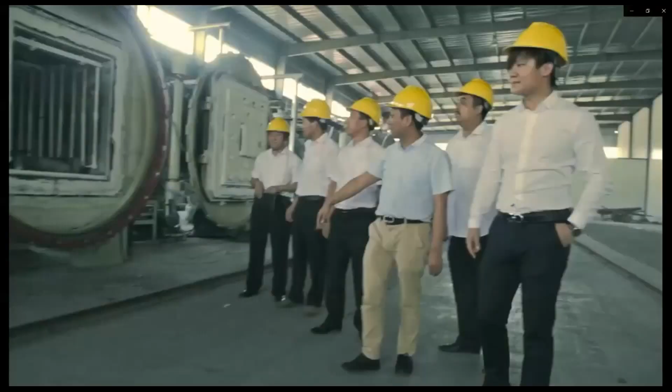After nearly 30 years of unremitting development, it has become the largest non-metallic wear-resistant new material production base in China, under the leadership of Chairman Jia Jianguang. Pengfei has adhered to the concept of independent innovation, winning 17 national invention patents and 31 new patents, the National Building Materials Industry Golden Globe Award, Independent Innovation Award, Best Non-Metallic Refractory Award First Prize, and a Special Achievement Award, International Patent and New Technology Export Golden Award, etc.

Exquisite, only because of the long experience.

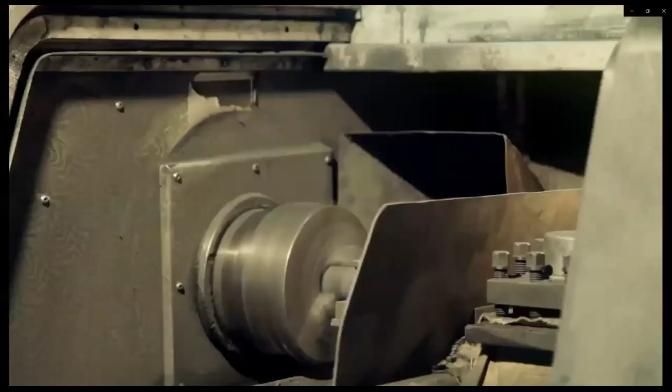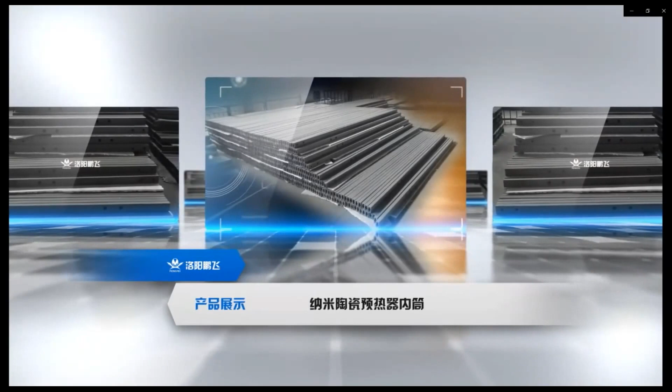Luoyang Pengfei Wear-Resistant Materials Company Limited is a high-tech enterprise mainly engaged in research, design, production and sales of high-tech wear-resistant materials. The products stand nationwide and are exported overseas. The company successfully developed nano-ceramic wear-resistant coatings and wear-resistant anti-corrosion pipeline components, nano-ceramic preheater inner cylinder, cast-steel ceramic composite lining, grinding plate, and nano-ceramics.

The newly developed cast-steel ceramic composite lining grinding plate lasts more than 10 times longer than domestic similar heat-resistant steel products, reducing friction temperature by 40%, and is widely used in cement, mining, steel, military, shipbuilding, armored vehicles, tank chassis, aircraft, and train industries.

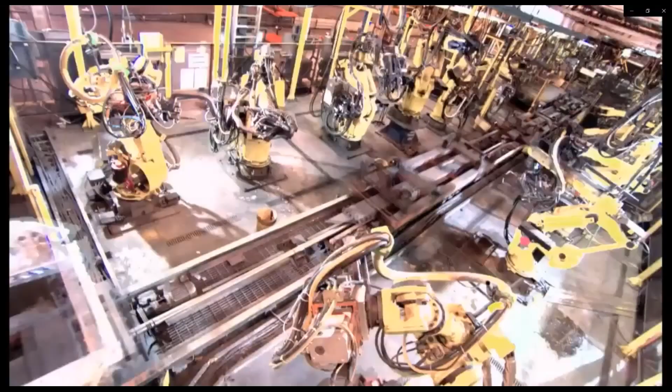The nano-ceramic preheater inner cylinder solves the problem of easy oxidative corrosion and deformation of metal inner cylinders at high temperature working conditions, extending service life by more than 2 times compared to the metal inner cylinder. It brings great contribution to plants by saving energy, improving production processes, and increasing economic efficiency.

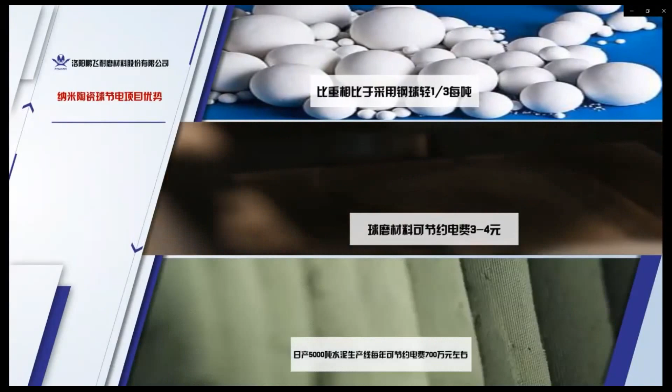The nano-ceramic ball power saving project utilizes a grinding system for cement plants by reducing electric consumption. $1 million will be saved annually for a daily production capacity of 5,000 tons cement production line using PF Series ceramic ball. Pengfei has become a famous brand through development of high-tech products, and in the future will continue to make more contributions to energy saving, product life, and economic efficiency for our customers.

In 2013, Luoyang Pengfei Wear-Resistant Materials Company Limited invested $15 million in the industrial cluster area of Ruyang County. The first phase of the project has been completed and put into production. In 2015, the annual growth rate was over 40% and profit increased by 200%. In 2016, the industrial sales value doubled compared to 2015, and profit increased more than 10 times compared with 2015.

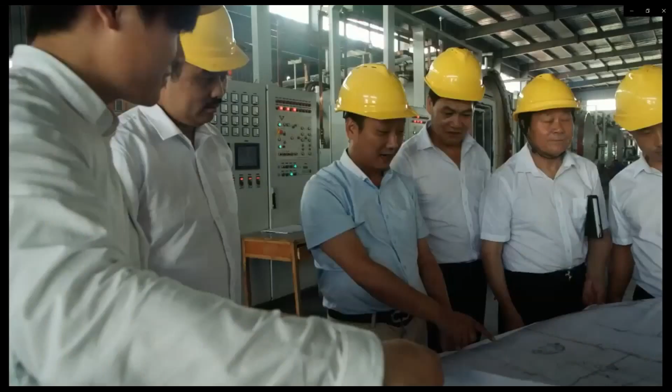In October 2015, the company's new third board was successfully listed, with stock abbreviation Pengfei Shares, stock code 833829, and now Pengfei is planning to achieve GEM listing within 2 years. It has become one of the most profitable enterprises attracting investment in Ruyang County.

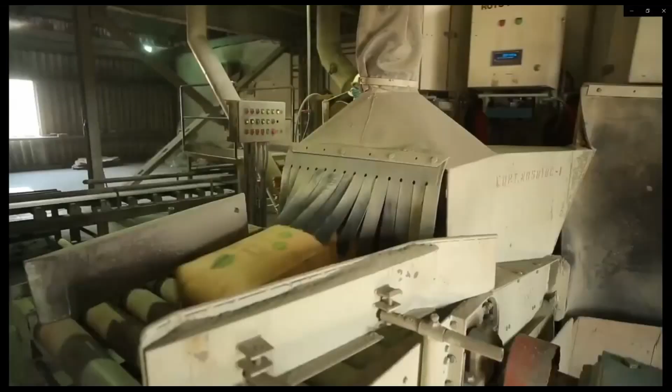In the future, Luoyang Pengfei Wear-Resistant Materials Company Limited will mainly serve the cement, building materials, and military industries to meet a broader development prospect. Hop like a fish in the sea, fly like a bird across the sky. A company that constantly innovates and maintains vitality will stand proudly at the forefront of the market and continue to write a new chapter in Pengfei.

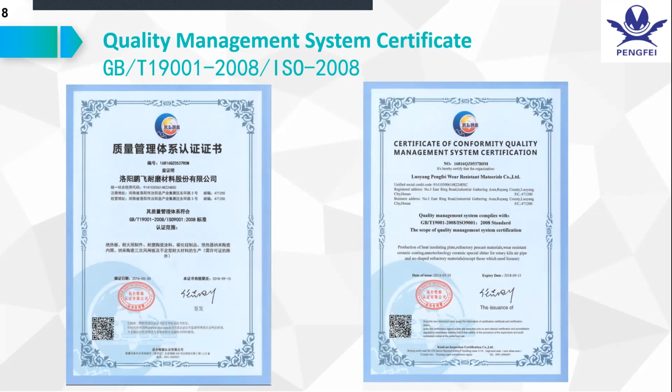As an international company, we have our ISO and GB/T management certificates. Okay, here we can go faster.

This is part of our long-term partners. As a 30-year history manufacturer, we have served most of the biggest cement players in the world - as we know, Conch, Sinoma, CNBM, Jidong, Heidelberg, Lafarge, and also in different countries like NCC, RCC, world brands. Also, the original equipment manufacturer in Shanghai is using our wear-resistant materials as original equipment. So you may now know what we do.

So here we go, I'm going to give you more details about our jobs and our products. We generally work in 3 sections. One is conveyor pipelines, where we transfer materials - big pipelines or small pipes, elbows - which protect this kind of equipment in cement plants or power plants, and also metal and other industries, specializing in cement and power plants.

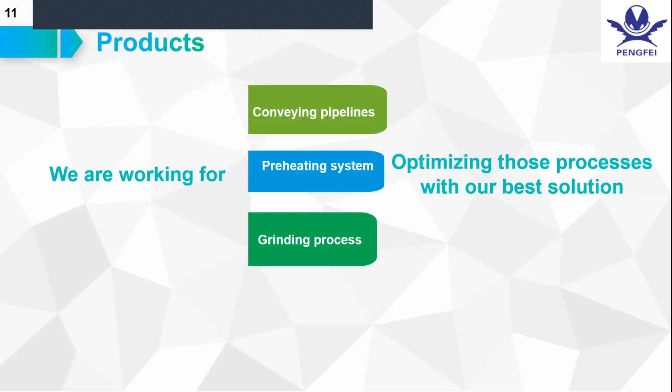And preheating systems, like cyclone stages - as we see the biggest tower in cement plants - and also one part for the grinding process. We have some products which are applied in grinding systems. Okay, so next.

First, as we said, we mainly do R&D specializing in industrial ceramics, applying in cement and power plant industries, etc. And you may ask, what does industrial ceramics mean? Usually there are many types - for example, aluminum oxide ceramics and silicon carbide ceramics. These are the major ones in industrial ceramics.

As for performance, aluminum oxide ceramics has a very high melting point and is very strong, with high hardness that can reach about Mohs hardness level of nine. It has super high strength, good chemical resistance, and good dielectric properties. As for another type of industrial ceramic, silicon carbide, it has high temperature strength, as we know, and also high thermal conductivity.

When aluminum oxide is matched with silicon carbide under high temperature, it's a perfect material with very stable performance, good for wear, abrasion, and corrosion resistance. That's why it's often used under high temperature, like in power plants or cement plants, a great material in technological fields such as national defense and high-tech industries. So it usually works in harsh working environments.

Next page, here we can see a sample picture from a plant I have visited in past years. You may be familiar with this kind of corner. The first picture versus the last page, we can see the second one is a big difference. Why? The second picture, which is very organized and clean, is from my client CUCC in China.

Right now in China, every plant's new line from beginning to end, from the mill to the silo, has been well protected by wear-resistant materials, ceramic coating. So the first picture, as we can see, let's go back to it.

Here you can see why this has dust everywhere. Why? What causes this? This is generally from the maintenance side, because the metal steel pipe gets heavy abrasion from the high-strength airflow materials transported during working conditions. So if the metal or steel pipe isn't protected by any materials, it gets broken, small holes often, and especially the elbow area may wear out easily after a couple of months.

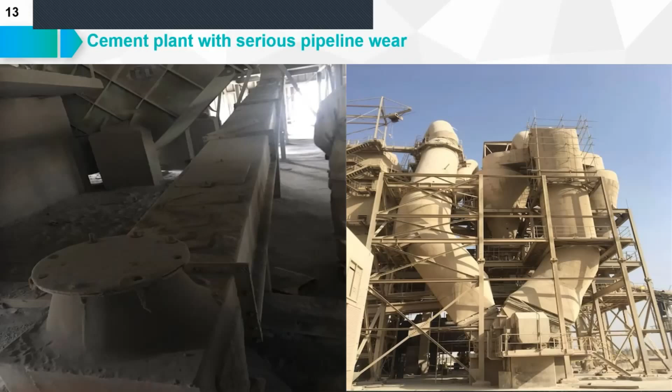Okay, next page. Here's what I'm first talking about: the importance of applying wear-resistant ceramic coating to protect your pipe and save your maintenance, to be more efficient with our products. So this is the beginning. Okay, let's see the reason, as I'll explain.

In cement or power plant industries, we have data showing about 50 to 55% of downtime is caused by wear and tear problems. Due to such very high-speed powder airflow conditions, traditional metal pipes have difficulty meeting such working conditions. That caused the problem we saw in the pictures.

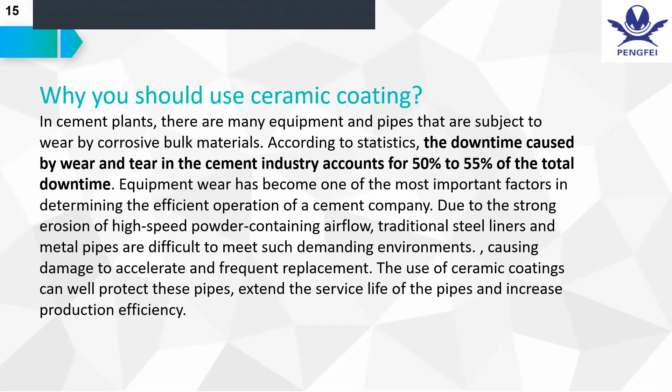And we're wasting a lot of manpower and money on repairing and big maintenance, so using ceramic coating is a very good idea to protect the pipes, extend service life, and make your production more efficient. Simply saying, saving money. Okay, next.

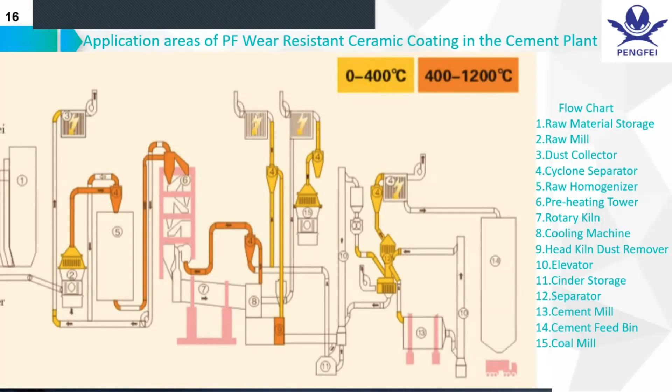This is a flow chart of a cement plant showing the pipe conveyor from the mill to the silo, with different colors and picture highlights. The wear-resistant coating materials have several types matched with different temperatures suitable for working conditions. Usually, low temperature control, like the mill, is no more than 400 degrees, and for high temperature, no more than 1200 degrees. We have different sections for these. Okay, next.

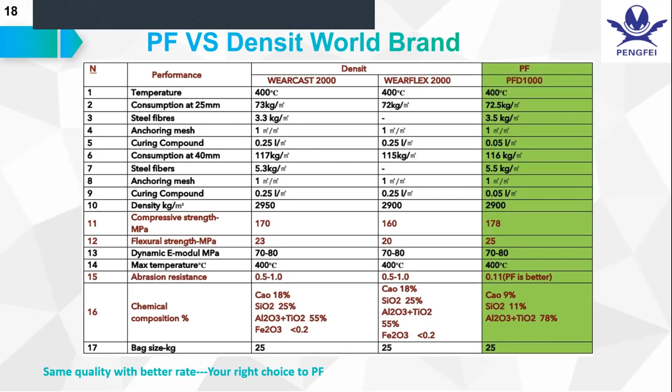Okay, next one. Ceramic coating is actually a very easy installation, like castable. They just have the metal mesh with fibers, mix with water, and apply in the pipe. So what's the difference between ceramic coating and castables?

Because they both have wear-resistant materials, you can see the big pipe. With ceramic coating, we only need to apply 25 millimeter thickness. When we reach the same function, same wear rate, castable usually has to apply about 100 millimeter. So the thickness is about 4 times more.

You can imagine in the pipe, when you apply on both sides, it reaches like 200 millimeters of castable - the inner diameter will be totally changed and get influenced, impacting the conveyor. Your materials' original design will get impacted. That's why ceramic coating is the perfect idea to replace castables in these pipes for these reasons. Okay, let's go to next.

I'd like to share one of our installation videos of ceramic coating wear-resistant materials, how it's applied on site. Okay, thank you.

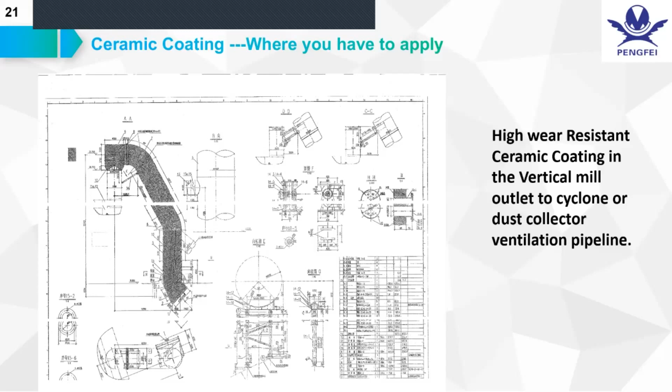So we just quickly go through where we have to apply during the cement plant process - the separator area, as we see. Okay, next.

Vertical mill - you see this is a big abrasion area. If you didn't apply here, you would always have abrasion problems.

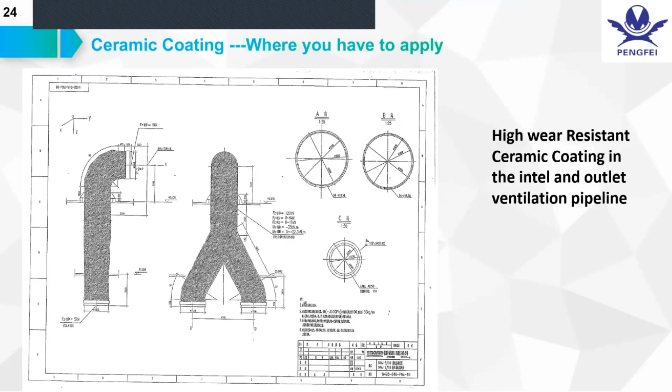Okay, ventilation pipeline. Next. The cyclone area. Okay, next.

Now this is a big pipe which applies ceramic coating wear-resistant materials. For small pipes like the coal mill, or very small diameter where people cannot enter, we have ready-made pipes or elbows connected by flange, with the wear-resistant materials ready inside, to set up directly at your plant.

Okay, now let's move to another process - the preheating system, which we can see showing the joint ceramic dip tube. Okay, inner tube, let's go.

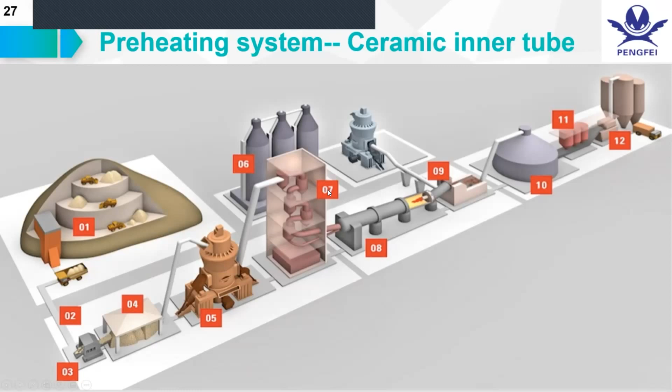This is a preheating tower. Usually we're familiar with the preheating system's cyclone stage. Here the materials are transferred by hot gases, and from the upper stage going by air vortex down to the bottom, to the cyclone at the bottom, and then come out to go to the kiln inlet.

So what are the functions of the cyclone preheating system? We can see the general function of the cyclone is to separate the materials from the hot gases. As we see in this figure, the hot gases and materials enter through the duct. Then inside the cyclone there's a very fast vortex separating the materials, going down, from the hot gases.

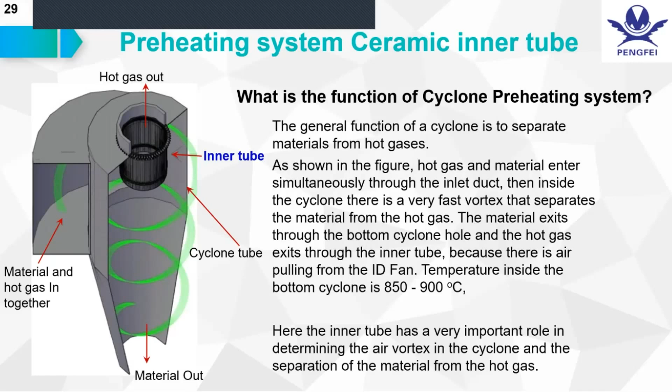So here, when we reach the cyclones down the line - for example C1, then C2, C3, C4, C5, even C6 - the temperature will even reach about 900 degrees, some even reach 1000 degrees, pulled by the ID fan. So we can understand the inner air vortex and cyclone, and the separation of materials from the hot gases. Okay, next page.

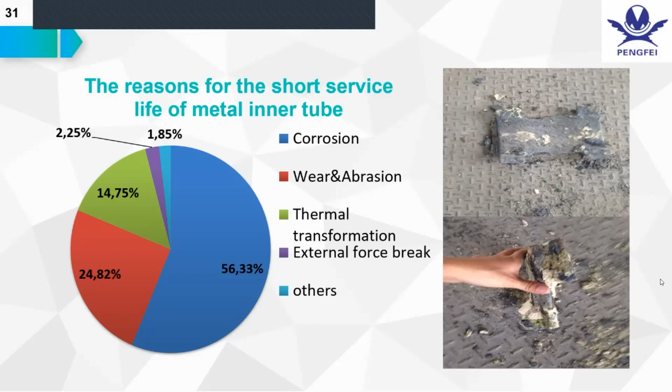Here, how to extend your inner tube life, as I explained, how to make your preheating system more safe. What happened in history before: the metal inner tube fell down and caused an accident that killed two people, two workers. That's why the Chinese government has very highly controlled this, like cyclone stage 5, we are obligated to replace it every 12 months. We have to replace it with a new one because it's a full risk and you don't know when. It's like a potential killer anytime.

So we know your problems. We have the perfect solution for you here. The Pengfei ceramic inner tube is invented to solve those problems, to replace heat-resistant steel materials. For example, for cyclone stage 5, we can extend the service life more than 2 or 3 times. From the factory, we guarantee 36 months of use.

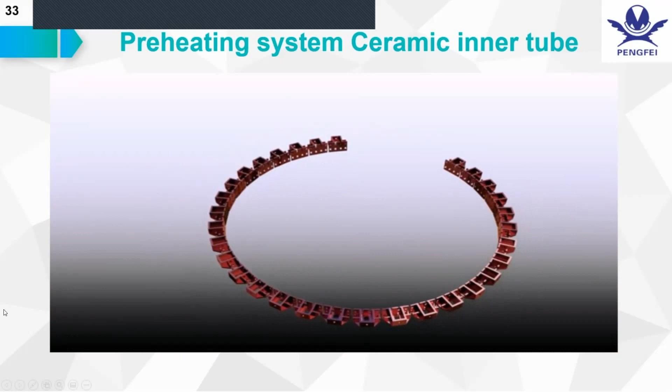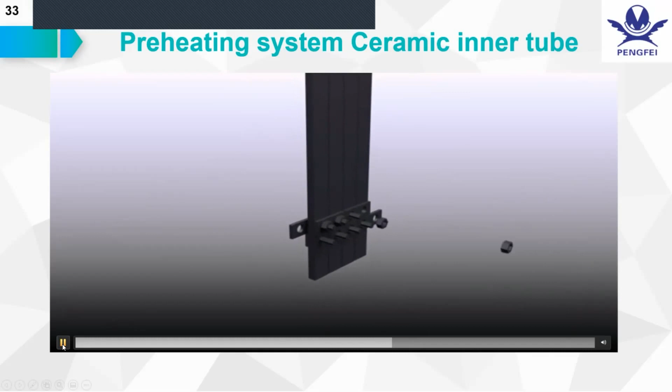I don't know if the video has voice or not. Now we see this. Okay, let's make a pause here.

Here we can see this red spare part, which is called the connection board. It's made of heat-resistant materials. Here it will be welded with the flange, and then connected through screws with the ceramic strip hanging parts. Okay, let's go.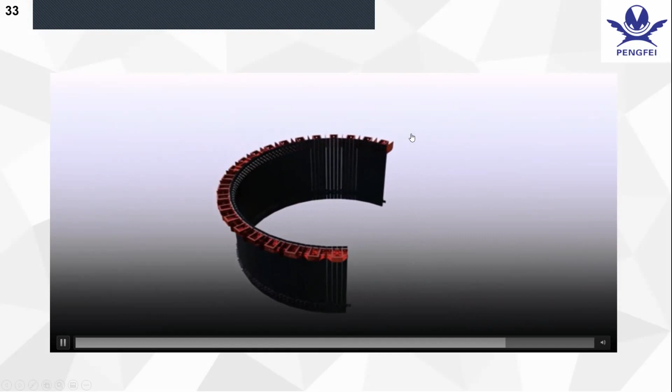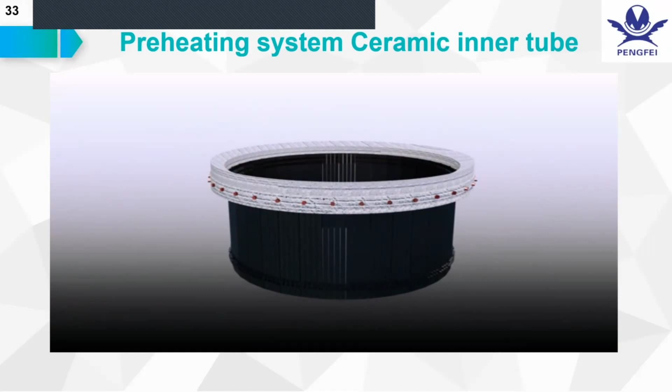This is the design of the ceramic dip tube. We can see from the construction how it's upgraded by such designs, with ceramics, because of the performance, the light weight, to solve the maintenance troubles, and for safety, as I mentioned.

Okay, I'd like to share another video. This just came from our client in Vietnam. It was the first inspection after running for 1 year. After running for 1 year on site, the maintenance, we see the feedback.

Now here are some advantages as I explained. First, a ceramic dip tube can reach application in 1,500 degrees, so it totally matches with such an environment of temperature. Second, it has very high abrasion resistance and corrosion resistance, to solve the problem of corrosion.

Third, it also has no sticking on the surface, so it's crash-resistant and has low adhesion. And as I mentioned, it has good heat vibration performance.

It means when it suddenly stops from the lab, as I made the test, from 1,000 degrees, suddenly cooling down the temperature within 15 times, without any change to the shape, without any issue — this thermal performance is very good. That's why compared to heat resistant steel, it handles the vibration of heating well.

So with the ceramic dip tube, we have great performance on these points. Also, for the air flux, that's why the preheating system is super durable and makes your preheating tower very efficient.

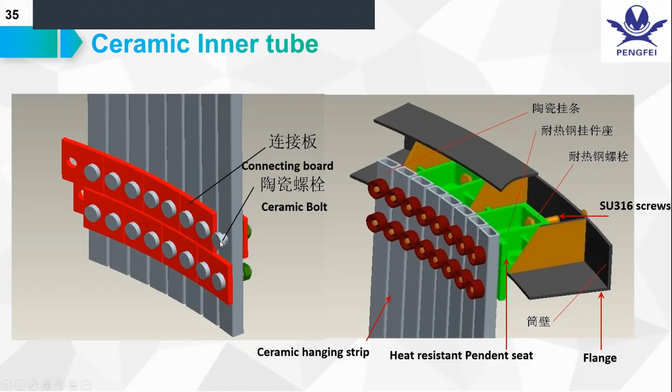Yeah, what's shown outside is all ceramics. The inside is still covered by castables in the end.

Here is an important video I'd like to share from our client. After running for 1 year, just at the downtime, we checked on site to see the real situation working there.

Okay, let's start the video.

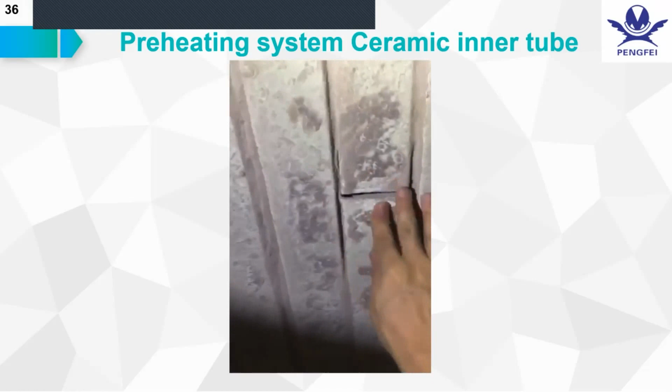Through these pictures, we can see our client is checking very carefully, piece by piece.

Through the video, we can see our client, after running 12 months, checking very carefully, trying to figure out the real situation and the working condition. We can see the total unit is very complicated.

The unit is doing very well, and there are 2 slight cracks in the whole unit. We have checked very carefully, and we think we don't need to make any change, and can continue use, waiting for the next maintenance, because this kind of slight crack doesn't influence the operation on site and can continue to be used after we check on site.

So you can see the second is C5, as I mentioned, the most harsh, difficult one. Here the photos show 4 pictures. First one is when we installed in 2018, the new one, and then in 2019 we have the first inspection time. We see it's running good, no maintenance needed. We continue to the next year, and last year we found a few pieces had fallen down.

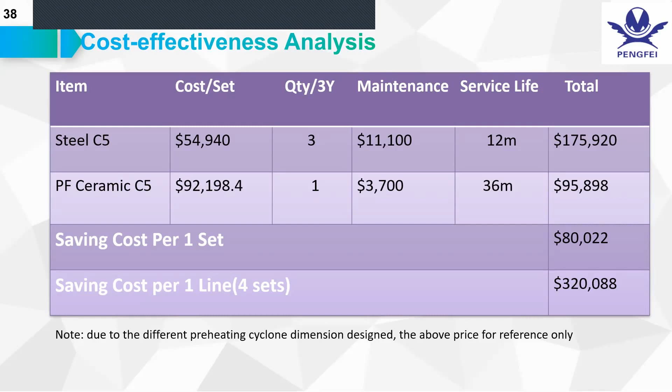Here's the first section, I think.

Nano-ceramic preheater inner cylinder solves the problem of easy oxidative corrosion and deformation of metal inner cylinders at high temperature working conditions. It extends service life more than 2 times compared to metal inner cylinders. It brings great contribution to plants by saving energy, improving production processes, and increasing economic efficiency. The nano-ceramic ball power saving project utilizes a grinding system for cement plants by reducing electric consumption. $1 million will be saved annually for a daily production capacity of 5,000 tons of cement production line by using PF Series ceramic ball. Pengfei has become a famous brand through development of high-tech products. In the future, it will continue to make more contributions to energy saving, product life, and economic efficiency for our customers.

In 2013, Luoyang Pengfei Wear Resistant Materials Company Limited invested $15 million in the industrial cluster area of Ruyang County. The first phase of the project has been completed and put into production. In 2015, the annual growth rate was over 40% and the profit increased by 200%. In 2016, the industrial sales value doubled compared to 2015, and the profit increased more than 10 times compared with 2015.

In October 2015, the company's New Third Board was successfully listed, stock abbreviation Pengfei shares, stock code A33829. Pengfei is now planning to achieve GEM listing within 2 years. It has become one of the most profitable enterprises in attracting investment in Ruyang County.

In 2016, Pengfei, together with Zhengzhou University and Luoyang Institute of Technology, jointly established the R&D and production base, the Luoyang Pengfei High-Tech Wear Resistant Materials Research Institute. It became a private enterprise relying on independent innovation of science and technology to develop rapidly, striving to achieve industrial sales value of more than $1.5 million by 2021.

In the future, Luoyang Pengfei Wear Resistant Materials Company Limited will mainly serve the cement, building materials, and military accessory industries, meeting a broader development prospect. Hop like a fish in the sea, fly like a bird across the sky. A company that constantly innovates and maintains vitality will stand proudly at the forefront of the market and continue to write a new chapter in Pengfei.

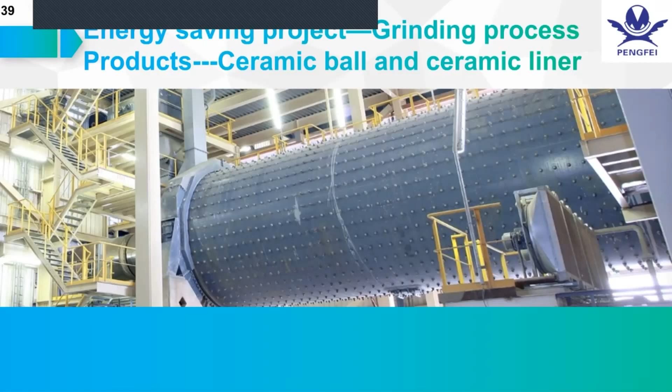So we go to the next page for the saving energy project. The first here is a picture of the ball mill. We divided it into specifics about how much wear per hour and per ton of cement. As professional grinding experts, we can easily figure out the working hours per ton of cement, and then calculate how much cost is in this ball mill process here.

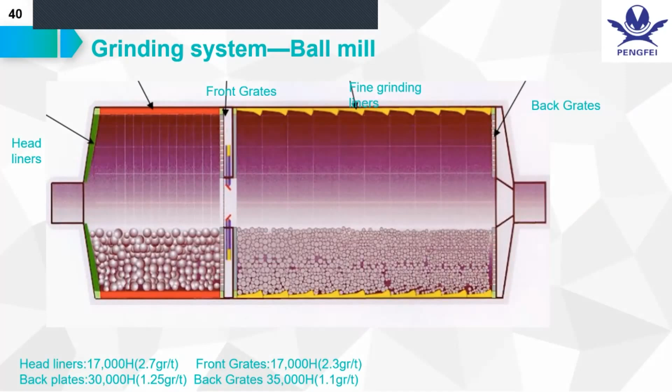So we go to the next page. As we can see, this is a ball mill standard one with 13 meters. We can easily say, at the last page, I think we have page 40. Okay, this page 40 we have the steel plate parts, the grinding media parts, and the liners and plates. Okay, we go to the next, page 41, please.

So we have a sample analysis for the cost per ton of cement, how much money we are spending on these parts. From the energy, we can see, for example, according to a 100 million ton per year production line, we are calculating by standard average PO 42.5 cement. The power consumption, we're going to spend about 33 kilowatts per ton, as a standard.

So we can see about 95% of the money is going to the energy, to the electricity power. We spend about 95%, or it means $2.3 per ton of cement. And then the grinding media is about 1.5, and the liners are about 3.3. This means, in this cost, if we save the energy, that's the major cost we save. That's a question we are considering. If we save the energy, it means we saved our cement cost, right? Okay, go to the next page.

This way we see from the start to the last, we have explained. Most of the money we're going for is energy, then grinding media costs. Usually the steel wear rate is about 25 grams per ton cement for the liners. We always think about how we apply our ceramics here, because we have very good wear resistance, and the density is only half of steel. If we use the grinding media as a ceramic ball, we make it lightweight, and then we decrease the energy. It means we make the full grinding process get saved. So that's the point we come to the ceramic ball and the ceramic liner.

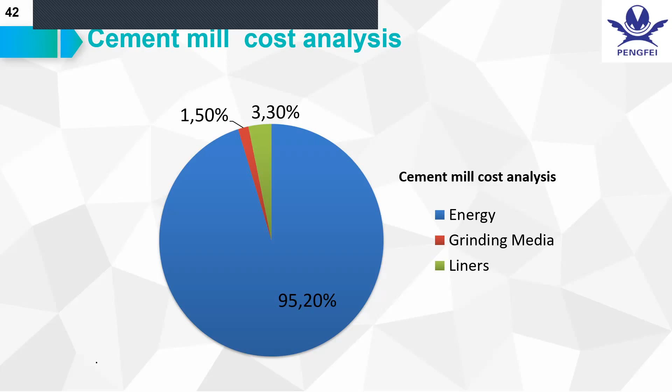Okay, we go to the next page. These pictures show that usually the ceramic ball is applied only in chamber 2, because ceramic ball has a high requirement for the material's fineness. Chamber 1 is still using the steel ball.

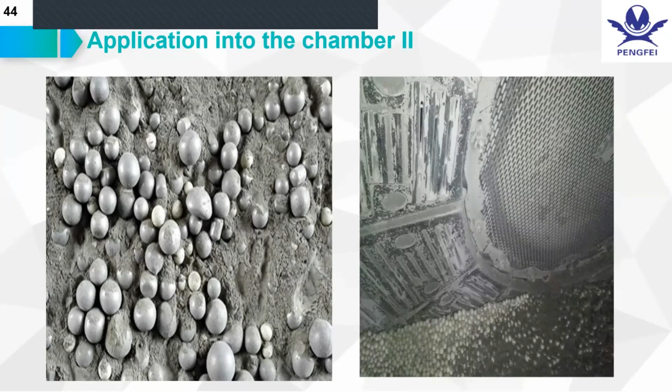Next pictures. The ceramic ball's advantages come from, as we say, mainly energy saving. The energy saving is usually about 3 to 5 kilowatt per ton cement. So you can easily calculate how much money you save after a million ton of line. Second is good wear rate. The steel ball is about 25, even some reach 40 grams per ton. A ceramic ball is no more than 8 grams, so you can see 5 times less wear. So your filling rate only needs maybe 1 or 2 times per year to fill, and you reduce maintenance cost and stopping time, extending your ball mill working longer hours.

Okay, next. From the quality side, what we can improve is, because ceramic has very good grinding performance, you improve your medium size, the particle. When the medium particle increases, it means your cement needs less water demand. If you reduce about 1 to 2% of the water, your end user will be happy with these results. The strength after 3, 7, or 28 days will get stronger, much higher. And of course it's green production, friendly to the environment, and temperature will decrease about 10 to 20 degrees.

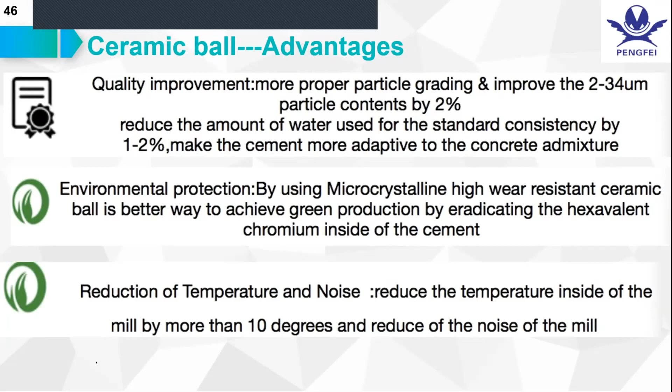Another product for the ball mill now is the ceramic liner. The ceramic liner is also a material mixing metal with ceramics. It's very high technology for this area, kind of a real revolution for the ball mill actually. It has matched both benefits of ceramic as wear abrasion resistance and metal as toughness and strength. So it's a kind of new material for ceramic liner we're applying in chamber 2 now.

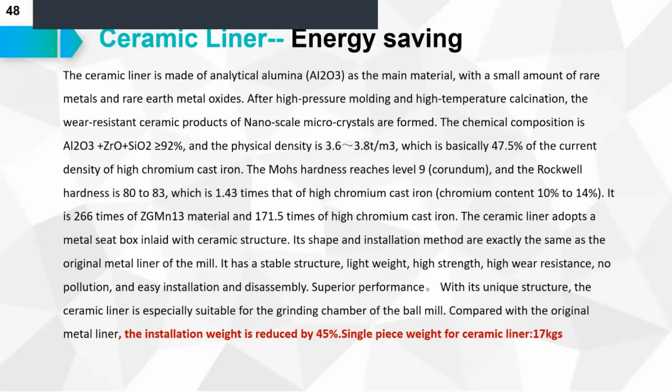The installation weight will be reduced 45%. It means one single piece of ceramic liner is only 17 kilograms. Usually for steel liners, one single piece is about 32 kilograms, some even 42. So what's good about the ceramic liner? It can match with all kinds of steel ball grinding media, or with ceramic ball grinding media, no problem, can match with all of them. Also the installation way, the shape, are exactly the same as the original design. It means you need no modification on your ball mill at all, we keep everything the same. So it means your whole ball mill's weight will be decreased. Let's go to the next pictures.

Once you can see the weight is decreased, the whole ball mill weight will be decreased about 40%, so the energy will be automatically saving. And one good advantage for the ceramic liner, as I explained, it can match with all the graded media, and it doesn't influence your capacity. It keeps everything as before without any influence, and you got your power saved.

It also has very high abrasion resistance. The service life can be extended 1 or 2 years compared to your high chrome cast steel liners. So what we can see, what we expected from this ceramic liner is really good results for all the cement plants, which are happy to apply it here.

So next page, please. We're going to share some customer cases online. This one is a customer case from BBMG, in the Jidong group, so belongs to maybe now Heidelberg. This is a first try.

In the beginning, he only tried 2-piece. Last year, December, he tried 2-piece, and then he ran it after 2,200 hours. The testing result is very great, you can see in the right pictures.

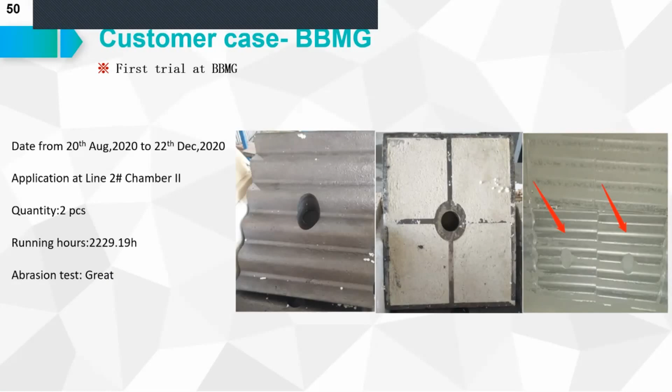So after he tested this for about 4 months, next page please, he changed the whole chamber 2. After 1 month, in January, he changed the whole chamber 2 with 1,080 pieces.

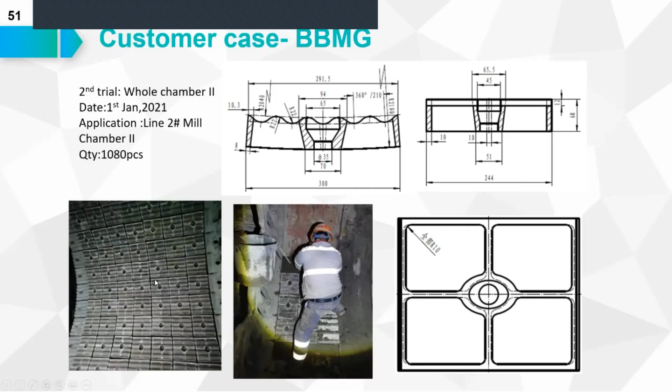So we can see the design and the style on site. Next pictures. After that, our first inspection was in June. It means January we started, and after 5 months we started to make the first inspection. We can see they are checking on site the difference, the wear speed.

Comparing to the new, about 12 millimeter difference, and the wear speed about 0.24 millimeter per month. So you can see they can calculate the service life, and the single weight is only 17 kilograms. This was tested on site by BBMG. Okay, the next.

This is fully installed in chamber 2. We can see on site the plant picture with ceramic liner. So here in this presentation we've introduced the ceramic liner.

We're also looking for plants which care about making their ball mill more efficient and more energy saving. We are ready to give a free trial test with a few pieces. Like BBMG, they can make a full test, see the strength, the wear and abrasion, then make an assessment even after a few months. They'll easily figure it out. So if you have any interest about this, we are open to arrange this kind of operation for ceramic liner.

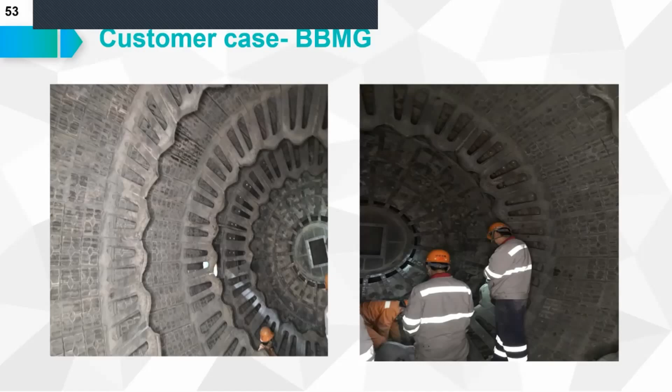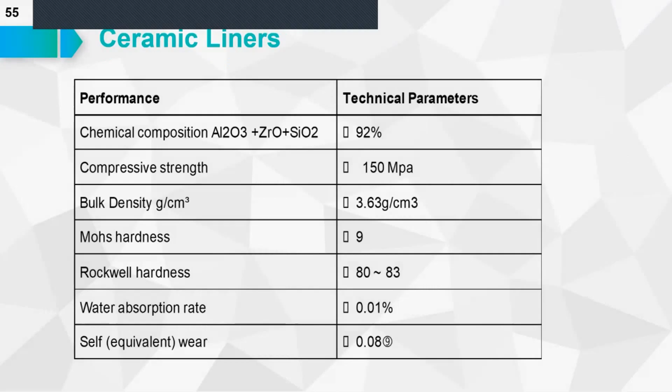We made a sample cost analysis as well to let you briefly understand how this benefits your plant. First, this is only based on the cost of materials. Usually we calculate according to the weight, the purchase cost, commercial price per kilo, and then we can figure out how much it benefits your materials in the beginning. Of course, we didn't calculate anything about the extra longer service life or labor cost, etc. So this is just a short idea about how these products improve your commercial side, whether for maintenance, plant management, or overall efficiency. So this is the ceramic liner, okay. Then we go to the next.

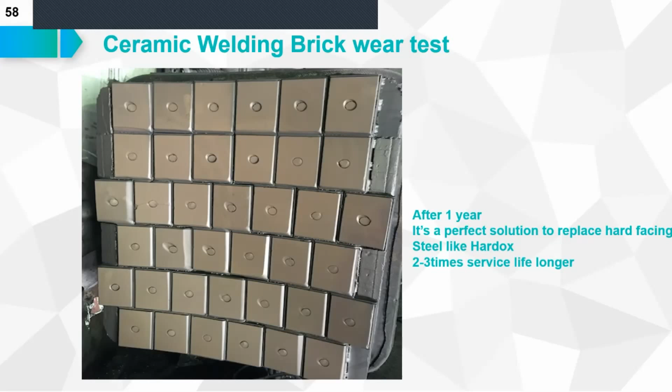So ceramic welding brick is, we can see, let's go to the next pictures. You can see how it's usually applied in the cement or power plant, in many different areas. We can see his surface is ceramics, covered by a metal steel. This metal steel is so he can be partly welded on the wall, making easy installation, so you don't need to worry about it falling down.

So usually we can use and apply this in a vertical mill shear, all kinds of feed chutes, and also steps, flow bends, and many places where there are wear problems and slight impact. It's easy to install, any welding worker can install it. They can even apply it in the separator, adapter, any area. Its thickness is about 29 millimeters.

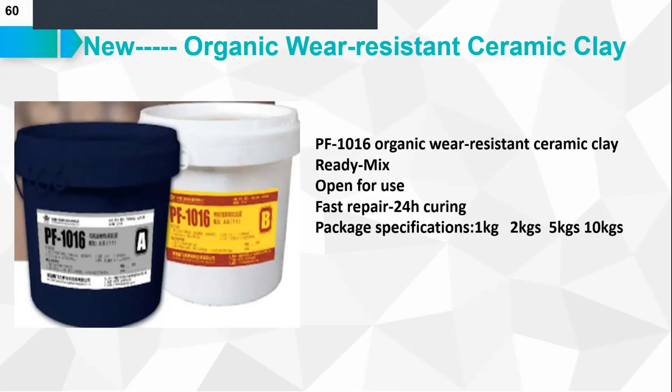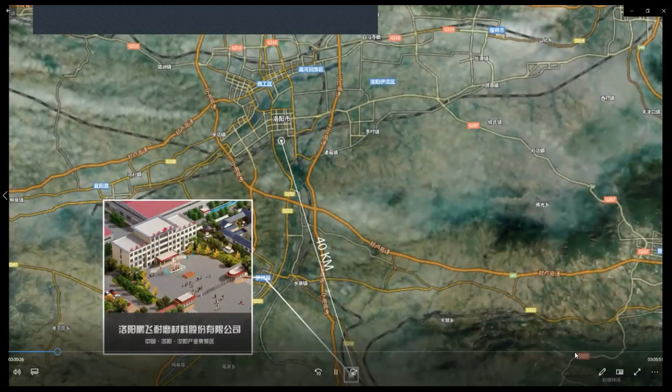Create brilliance with quality and win the world with strength. Luoyang Pengfei Wear-Resistant Material Company Limited is a national high-tech enterprise and a listed company in China. The company is located in Luoyang, Henan Province, the ancient capital of nine dynasties. The company covers an area of 300 acres and a building area of 68,680 square meters. Pengfei was founded in 1987 with the production of nano-ceramic wear-resistant coatings, nano-ceramic preheater inner cylinders, and other high wear-resistant refractories as the main products.

After nearly 30 years of unremitting development, it has become the largest non-metallic wear-resistant new material production base in China under the leadership of Chairman Jia Jianguang. Pengfei has been adhering to the concept of independent innovation, and has won 17 national invention patents and 31 new patents, including the National Building Materials Industry Golden Globe Award, Independent Innovation Award, Best Non-Metallic Refractory Award First Prize, a Special Achievement Award, and International Patent and New Technology Export Golden Award, among others.

Luoyang Pengfei Wear-Resistant Materials Company Limited is a high-tech enterprise mainly engaged in research, design, production and sales of high-tech wear-resistant materials. The products are distributed nationwide and exported overseas.

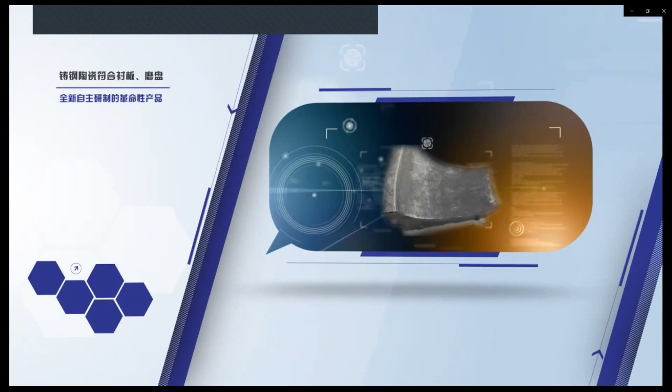The company successfully developed nano-ceramic wear-resistant coatings and wear-resistant anti-corrosion pipeline components, nano-ceramic preheater inner cylinder, cast steel ceramic composite lining, grinding plate, and nano-ceramic ball power-saving project, filling gaps in the industry. The newly developed cast steel ceramic composite lining grinding plate lasts more than 10 times longer than similar domestic heat-resistant steel products, reducing friction temperature by 40%, and is widely used in cement, mining, steel, military, shipbuilding, armored vehicles, tank chassis, aircraft, and train industries.

The nano-ceramic preheater inner cylinder solves the problem of easy oxidative corrosion and deformation of metal inner cylinders under high temperature working conditions. It extends the service life to more than 2 times that of the metal inner cylinder, bringing great contribution to plants by saving energy, improving production processes, and increasing economic efficiency.

The nano-ceramic ball power saving project utilizes a grinding system for cement plants by reducing electric consumption. One million dollars will be saved annually for a daily production capacity of 5,000 tons on a cement production line by using PF Series ceramic ball. Pengfei has become a famous brand through the development of high-tech products, and will continue to make more contributions to energy saving, product life, and economic efficiency for our customers.

In 2013, Luoyang Pengfei Wear-Resistant Materials Company Limited invested $15 million in the industry cluster area of Ruyang County. The first phase of the project has been completed and put into production. In 2015, the annual growth rate was over 40% and profit increased by 200%. In 2016, industry sales value doubled compared to 2015, and profit increased more than 10 times compared with 2015.

In October 2015, the company's New Third Board listing was successfully completed, under stock abbreviation Pengfei Shares, stock code 833829, and now Pengfei is planning to achieve GEM listing within 2 years. It has become one of the fastest-growing and most profitable enterprises among investment-attracting enterprises in Ruyang County.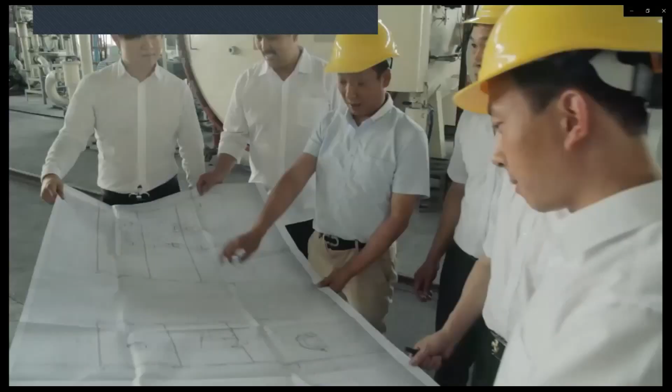In 2016, Pengfei, together with Zhengzhou University and Luoyang Institute of Technology, jointly established the R&D and production base, the Luoyang Pengfei High-Tech Wear-Resistant Materials Research Institute. It became a private enterprise relying on independent innovation of science and technology to develop rapidly, striving to achieve industry sales value of more than $1.5 million by 2021.

In the future, Luoyang Pengfei Wear-Resistant Materials Company Limited will mainly serve the cement, building materials, and military industries, among others, to meet a broader development prospect. Hop like a fish in the sea, fly like a bird across the sky — a company that constantly innovates and maintains vitality will stand proudly at the forefront of the market and continue to write a new chapter in Pengfei.